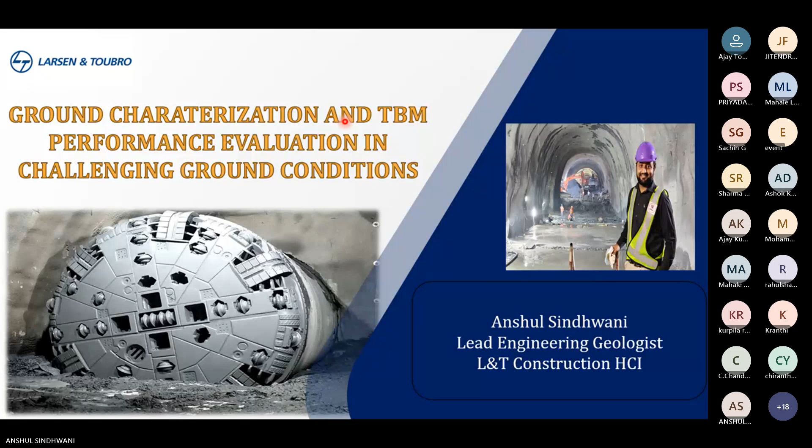So I'll just start now. Some of the summary which I'll be covering today: introduction of the particular case I am speaking about, geology of that area, geophysical investigations, ground improvement. We had made some key observations before TBM excavation and during TBM excavation. Since the topic is focused on challenging ground conditions, what exactly is the effect of these difficult ground conditions on the TBM advance rates? Then I'll conclude.

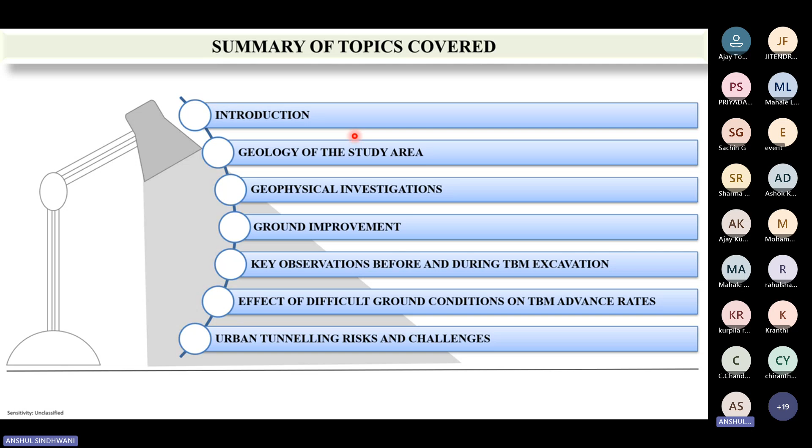Use of TBMs in urban and hydro projects have gained increased popularity in recent years. As we all know, it offers comparatively fast, safe, and high-speed tunneling. However, the lack of extensive investigation often leads to cost and time overruns of these projects. So the presented study will be an ideal example of how the integration of different sorts of investigations helps in reducing the ground uncertainties.

This is one of the projects in Mumbai where I've been involved as the engineering geologist. The study location, if you can see, is next to the Arabian Sea. This is in South Mumbai, and this particular location is sitting next to the sea. We call it the Machimar Nagar location. This is the particular location I'll be speaking on with regard to today's topic.

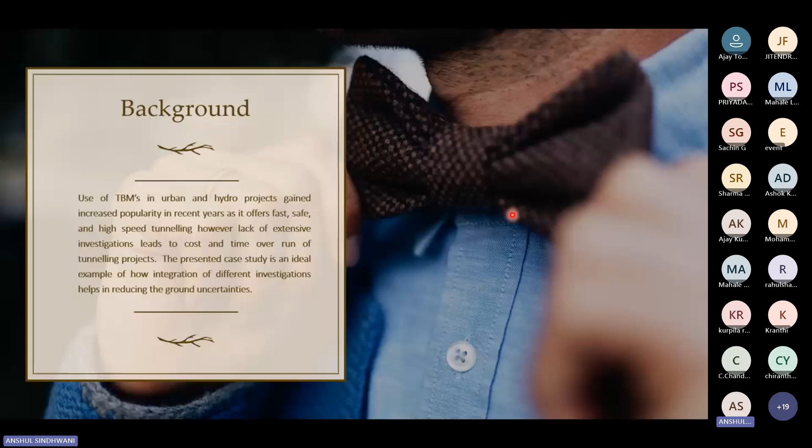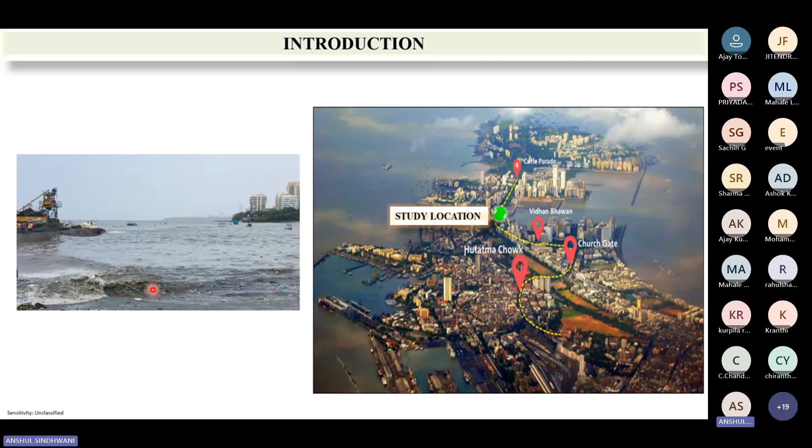If you can see a closer view of that particular location, you can clearly see the tunnel alignment was sitting next to the sea shore. So obviously, as a layman also, we'd anticipate some sort of difficult ground just by looking at this scenario. So understanding the ground in a detailed manner is very important in this particular case, which we got a feeling of as a geological engineer.

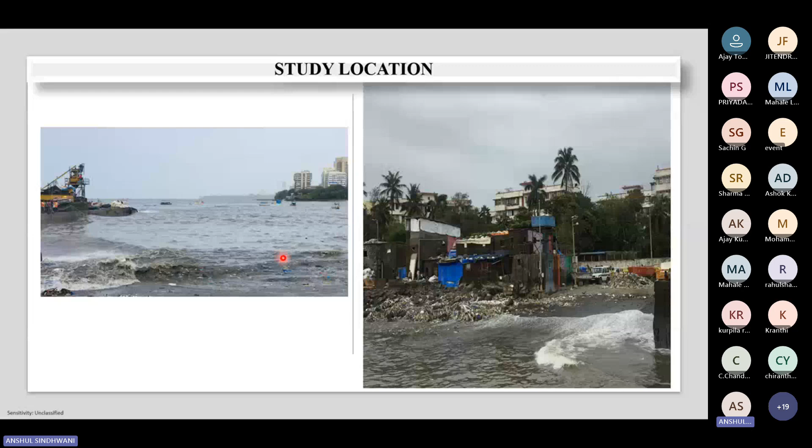This is just to have a more detailed view. This was the view standing on top of the tunnel alignment, and this is from the sea side. This is the location where our TBM tunnel was supposed to drive below this particular road. We can see there are high and low tide variations also happening along the seashore.

If I talk briefly about the regional geology, many of you might be aware that Mumbai actually consisted of seven different islands if we go back in the geological time scale. In fact, this Mumbai High Court, if any of you have seen it, was supposed to be the end of that specific Mumbai coast.

However, during the course of time, what we can clearly see is this is the present situation. If I backtrace this particular location along these three images, we can clearly see this was part of the sea earlier, and it is like a reclaimed land, where this tunneling was proposed.

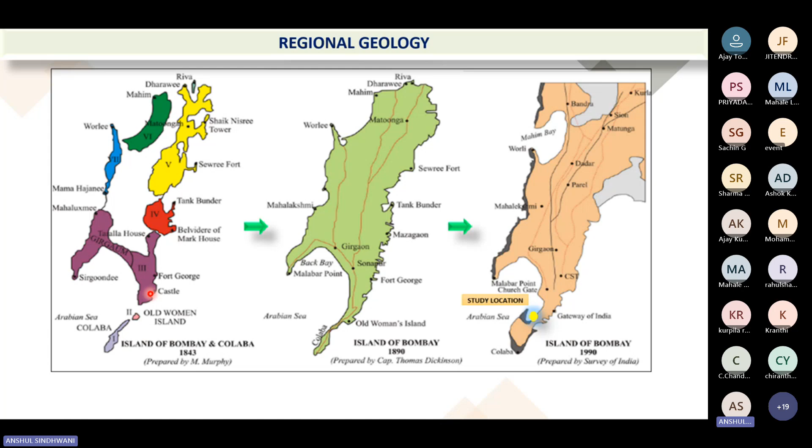So I'll brief again on these two boreholes' results. What we can see here, we had anticipated a filled up material and clayey sand, silty sand of 4 to 7 meter deep, and then a weathered basalt layer below. There is a bedrock basalt in one of the boreholes, whereas in the other borehole, you can clearly see there is a high degree of fracturation.

And in fact, when we did the packer permeability test in this particular zone, high water loss was also recorded, which indicates that the joints are open and fractured. Degree of fracturation was obviously visible in this particular case. So these two

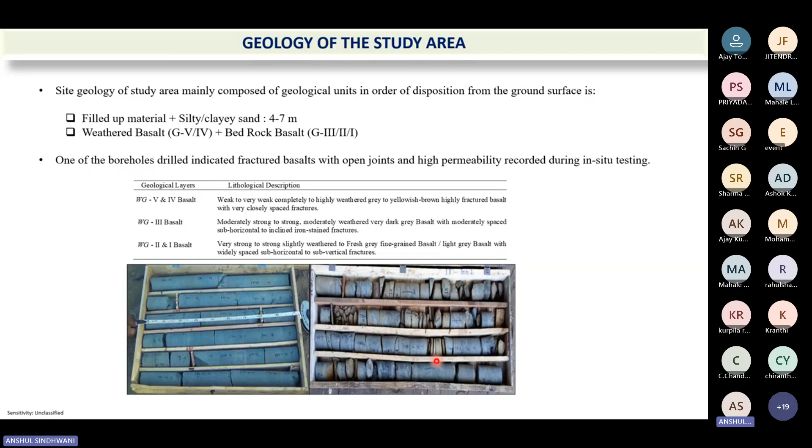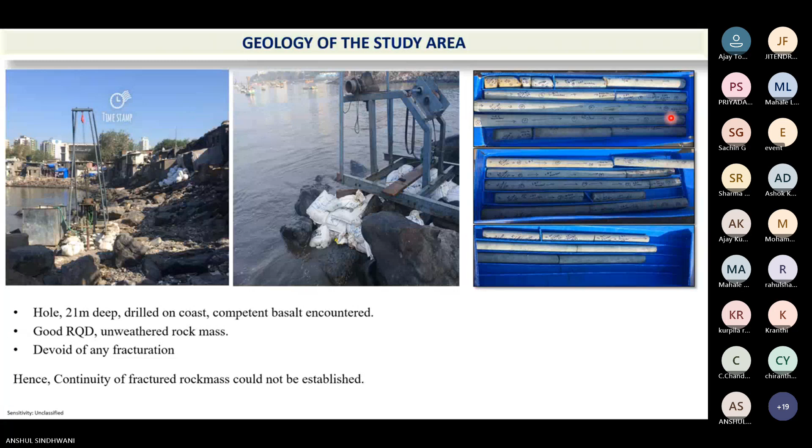But if we go back to the layout again, in one of the boreholes it is indicating there is a fractured zone. But when we are moving towards the sea, it is having good hard rock sitting below. So if we conclude these two particular things, you can clearly see the filled up material is rather going down. However, the degree of fracturation is only limited to this particular borehole. Other boreholes are indicating still a good rock.

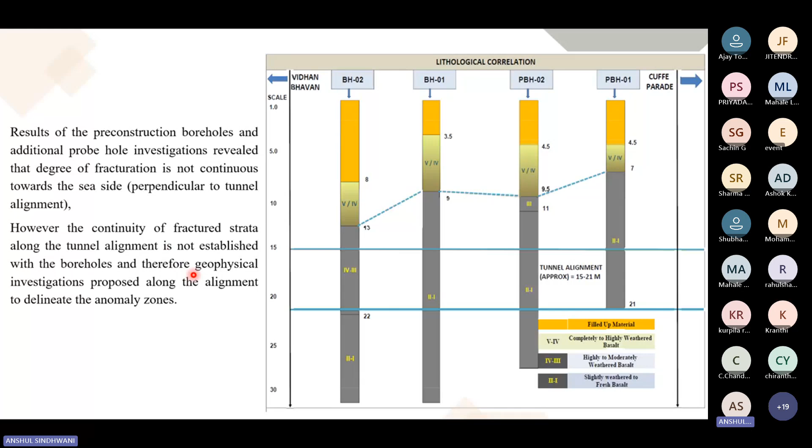So the result of these pre-construction boreholes and additional probe holes revealed that the degree of fracturation is not continuous towards the seaside, which is like a perpendicular direction to the tunnel alignment. However, this continuity of fractured strata along the tunnel alignment is not fully established with the boreholes. So then we decided to move on to the geophysical investigations along this alignment to delineate the anomaly zones.

So if I go back to the layout, these two lines we had proposed in the form of both electrical resistivity as well as seismic refraction, to have a detailed understanding and to integrate this data with the borehole investigation.

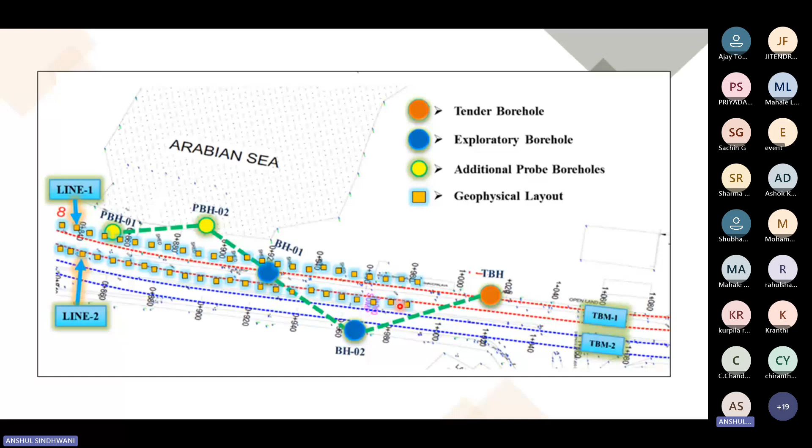So electrical resistivity did indicate a low resistive layer. If we see the 3D section on one side, which is toward the seaside, you can clearly see a domination of bedrock, having high resistivity, whereas on the other side, which is rather away from the seaside, there is a low resistive zone.

Even if we see in this cross section, it clearly depicts a low resistive zone on one side, whereas on the other side, it relates well with our investigation which we carried out on the seaside, and it revealed that the ground is definitely good when we are moving towards the seaside.

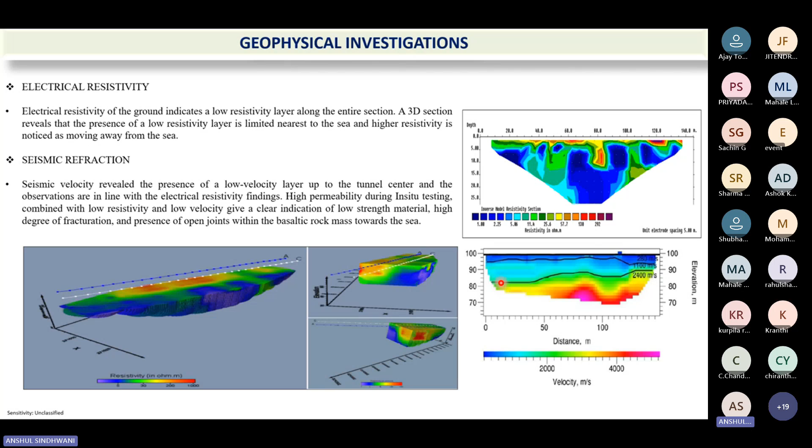Even when we go to the seismic refraction results, it clearly indicates there is a dipping of low velocity layer up to the tunnel depth in one of the lines which we executed. So then what we did is we plotted the exact tunnel zones in this geophysical investigation results so as to ascertain exactly at what particular point this is happening. So on the seaside, we can clearly see there are high resistive zones, there is no problem.

Whereas on the other side, there are low resistive zones sitting. Even in the seismic velocity, you can clearly see there is a low velocity zone encountered here. So with this data, we had confidence that the ground is not as bad as we were expecting, but at the same time, this fracturation or discontinuity will be there, localized, maybe 10, 20, or 30 meters, but not all along as we anticipated at first.

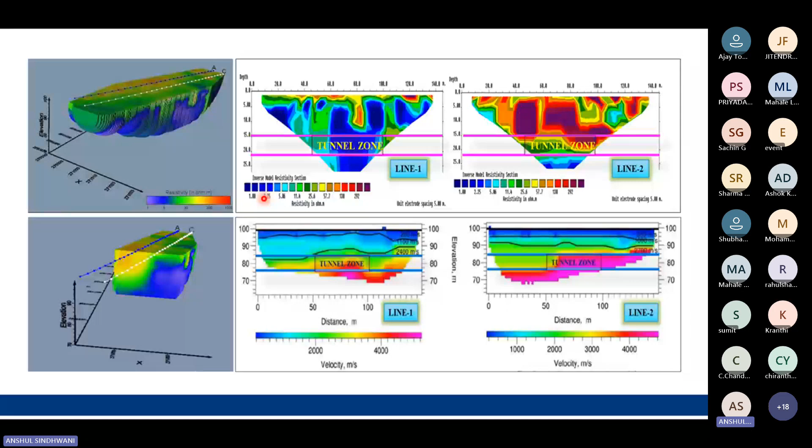This certainly helped us to understand what lies in the ground and what we could expect during the TBM drive. But after seeing this, we had to go for ground improvement as well.

But there was a limitation when doing the grouting, because if you can see the zone I'm indicating here, this was the zone where the slums were located, so in this particular area we could not do anything. Even on this side, it's a high traffic volume road running towards the Colaba side, so on the road too we could not do anything. This was a slum location where practically nothing could be done.

So we only did grouting at the zone where it was feasible, anticipating certain fracturation in three lines. Line one went up to 23 meter depth, almost 2 meters below the tunnel invert. Then there was a second line, which we call secondary, also going up to the tunnel invert. We created primary, secondary, and tertiary lines.

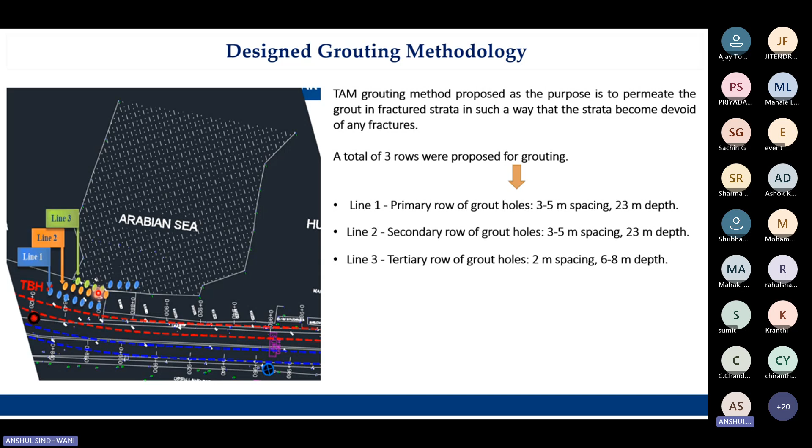The third line was specifically made only for the filled-up layer, because basaltic terrain has subvertical joints, so there was always a possibility of seawater seeping through this filled-up layer via the subvertical joints onto the tunnel alignment. So we did grouting as a tertiary row only for the filled-up layer, which is 6 to 8 meters deep, limited only to this particular zone.

With this experience, these are just some photographs depicting the work we carried out. You can clearly see this is on the seaside, where we did some improvement.

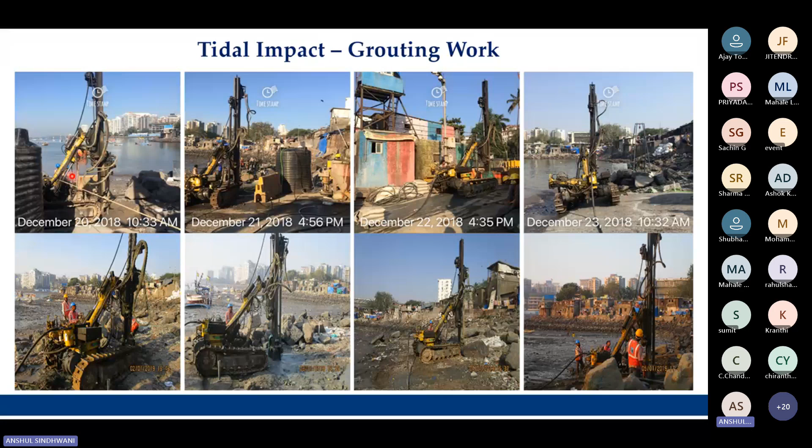This is just to give you a view of low tide and high tide. If you can clearly see on the bottom side, this is the low tide time where we could execute in a better manner, in comparison to the one on top which is during high tide, where it was not easily executable.

So moving forward, we had investigations in place to ascertain the challenging ground we were anticipating. Then we moved on to the ground improvement.

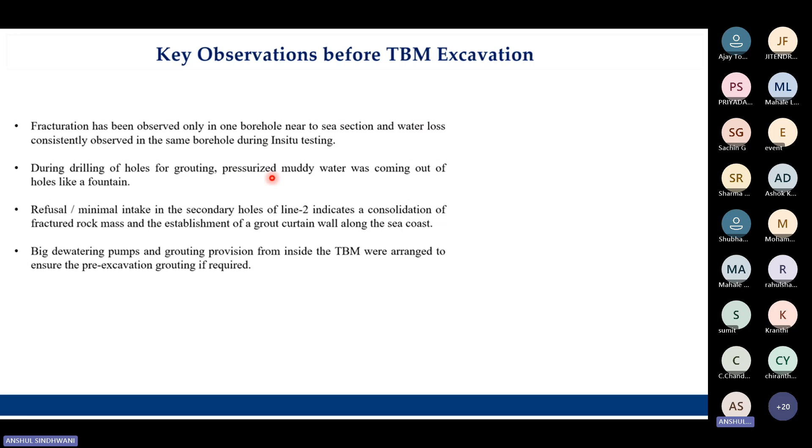Now, to sum up, there were some key observations made before TBM excavation: fracturation was observed only in the borehole, as discussed, and water loss was consistently observed in the same borehole during in-situ testing. During drilling of holes for grouting, pressurized muddy water was coming out of the holes like a fountain. I'll show a video to explain this further.

Just trying... hope it is visible now.

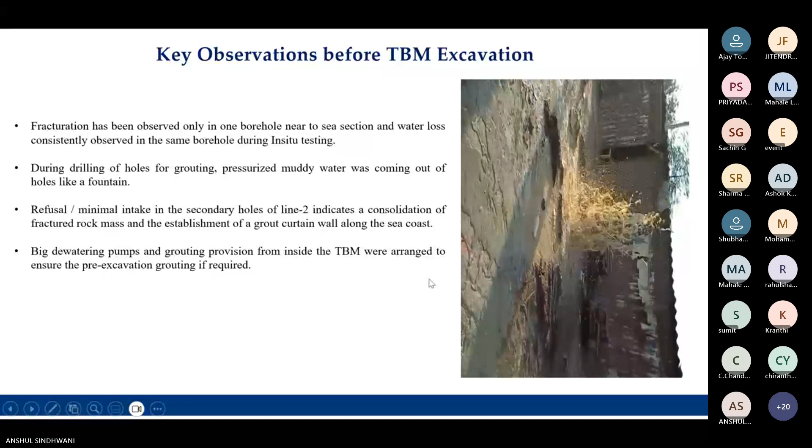So when we started executing the ground improvement, you can clearly see after the drilling is done, we were about to start grouting, and you can clearly see how the water is coming out. This really indicates the fact that this is a reclaimed zone, and since we punctured this reclaimed ground, the pressurized water present in the ground is coming out with certain pressure.

However, we moved ahead with the grouting, but this again gave an indication that the ground may have some challenges we are not fully able to delineate, where exactly it is, but it must be there in patches, which is our understanding.

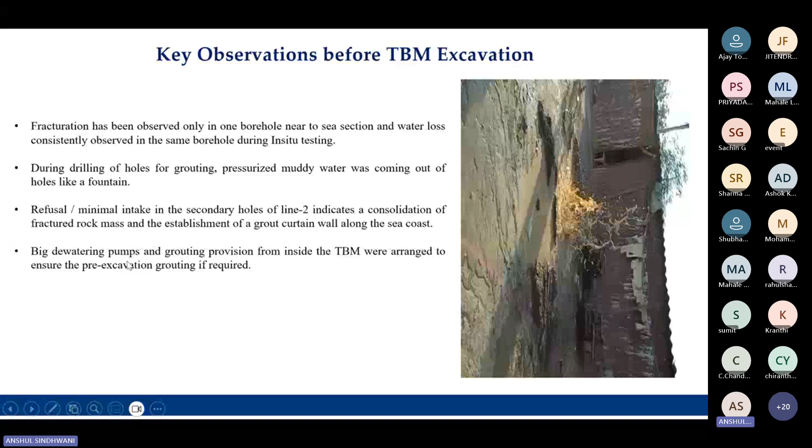So what we did is keep big dewatering pumps and grouting provisions ready from inside the TBM as well, to assure that if any situation arises during TBM excavation, we would be ready for high dewatering as well as pre-excavation grouting from the TBM.

Now, during the actual execution, since we are already aware that this is going to be running near the sea, we know exactly where the changes have to come. So there are three different zones. I'll just choose the pointer.

So zone one was grade 2 basalt, weathering grade 2 we call it. Then there is a moderately weathered zone, which is grade 3. And then there is a completely to highly weathered basalt, which is what we have been seeing in different pockets during our course of investigation.

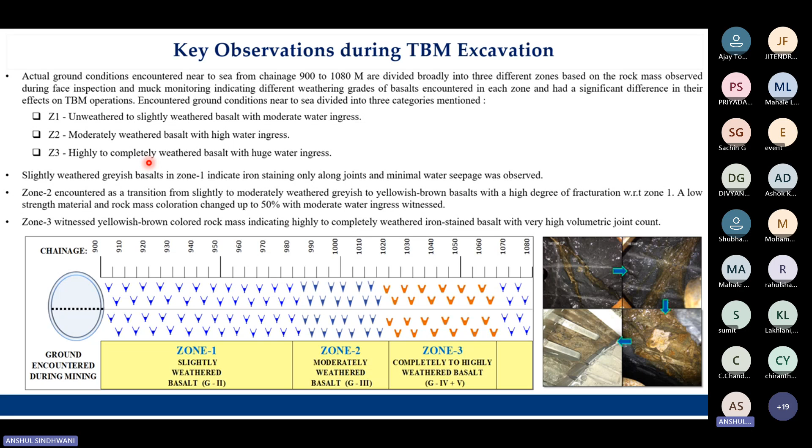So like I've said, zone 1 is unweathered to slightly weathered basalt with moderate water ingress. Zone 2, where we had anticipated high water ingress, and zone 3, where it has led to many challenges, which I'll be discussing subsequently.

So this is in terms of TBM advance rates, what we actually achieved during the course, exactly near the sea. This is again to depict we were doing two things at a time: one is the face inspection, where we physically see the ground, and another is rock chip evaluation. So you can clearly see how the degree of weathering is increasing as we move through different zones. Zone one, which is unweathered or slightly weathered basalt, achieved rates of 40 to 50 meters per week.

In zone two, it has even increased to 54 meters. This is because it is moderately weathered, so ideally the UCS becomes low in comparison to zone one. Even the RQD becomes low, so it is easier to achieve more progress.

However, when we move towards zone three, you can clearly see a 50% reduction in the advance rates, to 20 to 25 meters per week. And beyond zone three, again, slowly we have moved towards the same range as zone one. So this fourth zone indicates where again the unweathered basalt has been encountered.

If I talk about zone one, it was having compressive strength of more than 60 MPa. RQD was in the range of 70 to 100%, and we were classifying it as class 2 rock.

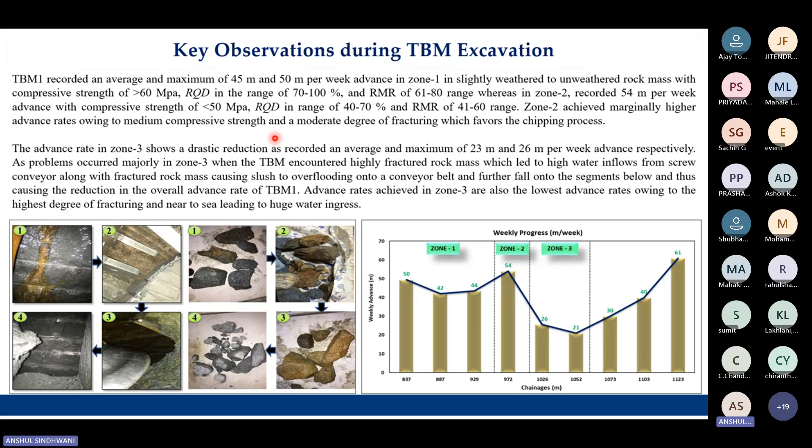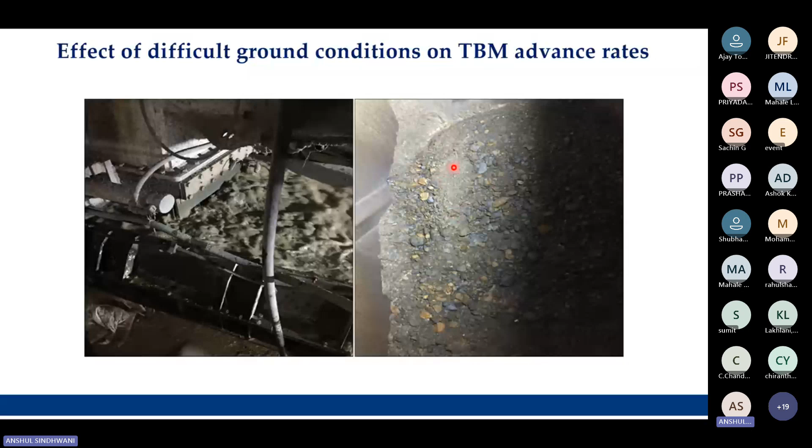Moving on to zone 3, you can clearly see muddy water coming out of the conveyor, and on the right hand side you can clearly see it is like a slush coming out. So 80 to 90% was mainly silt material, and the balance 10 to 20% was the weathered rock chips which we had encountered.

So this was more about what exactly we had encountered and what we anticipated before TBM excavation. Now I'll be talking about the evaluation part in terms of TBM performance, since the TBM performance is directly linked, and we know how to operate in these particular situations. If we are facing challenging ground conditions, that doesn't mean nothing can be done. Certain challenges can be reduced by optimizing the TBM operational parameters, which you will see here.

So I'll be speaking on 6 different parameters. The first 3 parameters are more related to the operations part, which is what is in our control, and then there are performance parameters, which are more related to the penetration rates. So if we can see in zone one, the thrust force was varied between 10,000 to 14,000.

Since it is an unweathered or slightly weathered rock mass, basically higher thrust forces are required. Whereas in zone 2, the thrust force has reduced below this green line, indicating a range of 8,000 to 10,000. This reduction is witnessed because of the moderate degree of fracturation and low compressive strength, which has basically eased the chipping process, so the thrust requirement has been reduced.

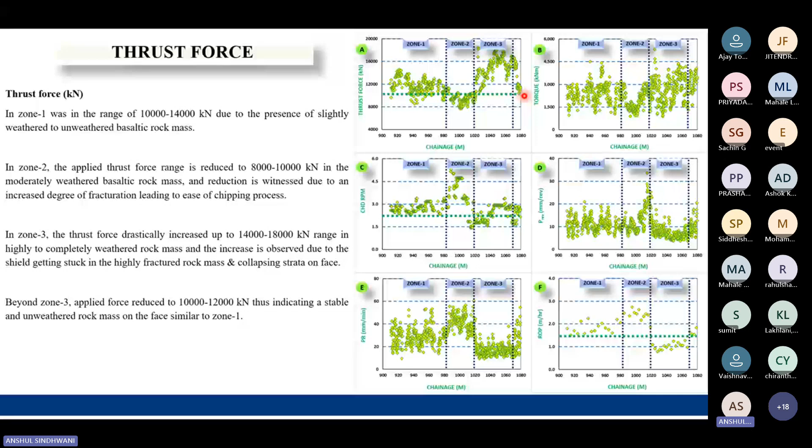If I move to the other parameter, torque, in zone 1 this is more of following a range of 1500 to 3000, indicating a smooth cutting of rock mass on the face. Whereas in zone 2, because of the moderate degree of fracturation and reduction of thrust forces, this torque has also reduced a bit.

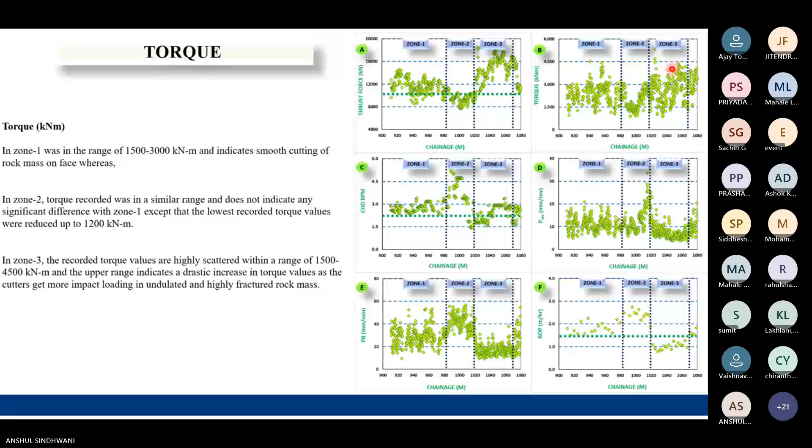Whereas in zone 3, there is high scattering. This scattering happens because when you have a fractured rock on the face of the TBM, there are always undulations. So the cutters get more impact loading when in touch with the rock mass, whereas on the other side there is no rock mass because of this degree of fracturation. So zone 3 indicates higher and lower values, creating a scattering pattern, which reveals the fact that the ground remains fractured in zone 3.

Now, if we go to the cutter head rotation speed, which is how many times the cutter head has revolved in a minute, for zone 1 we have followed a range of 2 to 3 revolutions per minute. This is bare minimum required because you have hard rock ahead of the TBM face, so you need the revolutions to be on a higher side to facilitate optimized penetration rate.

Whereas in zone 2, since we are getting low thrust force and the speeds are also increased, we can clearly see the increase in RPM, which has facilitated higher advance rates. In zone 3, there is a range bound we followed. On the first end it was from 1.5 to 2 only, and slowly it increased, following a pattern of 1.25 to 3.

If I sum up in this table, you can see all three parameters at once: thrust force, torque, and operational RPM, indicating the TBM operational parameters. Now, reduction in RPM is also to limit the disturbance to this highly fractured rock, because more RPM would lead to more degree of fracturation at the face, which will lead to more settlements and more shield confinement as well.

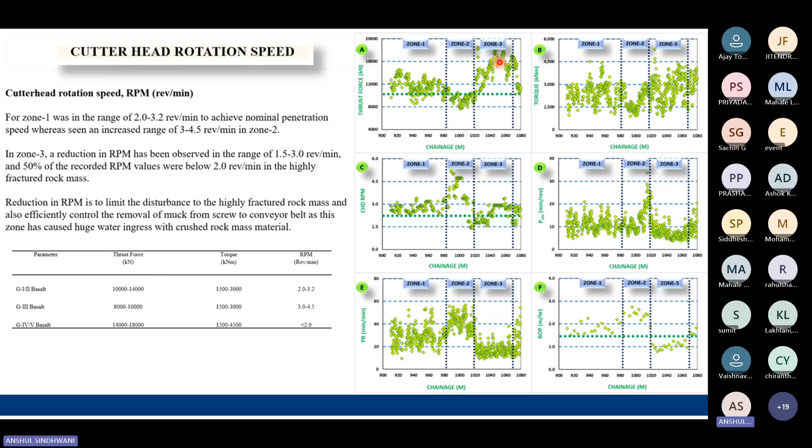So I forgot to tell you one thing. This thrust force has not only increased because of the extra muck we are keeping in the chamber, but also because of the shield confinement. When we have a fractured zone, our shield has passed through that fractured zone. Because of this high fracturation, the ground tends to settle in, so there is higher friction force in the shield, which is creating more thrust force.

Now moving on to the performance parameters. The first parameter is penetration per revolution. In zone 1, it has clearly followed a range of 8 to 16 to 20 mm per revolution.

Whereas in zone 2, it has again followed a similar range, but then it is shooting up a bit. If I conclude, it has mostly followed a range of 10 to 20 mm per revolution.

Whereas in zone 3, since we are going slow, we are cutting the rock slow. You can clearly see there is a dip below 10 mm. Average, if you see, it is coming out to be 6 to 8 mm only.

Now, this again indicates the fact that by our own will, we are going slow so as to assure we are limiting the surface settlements. At the same time, we are ensuring less water ingress is happening.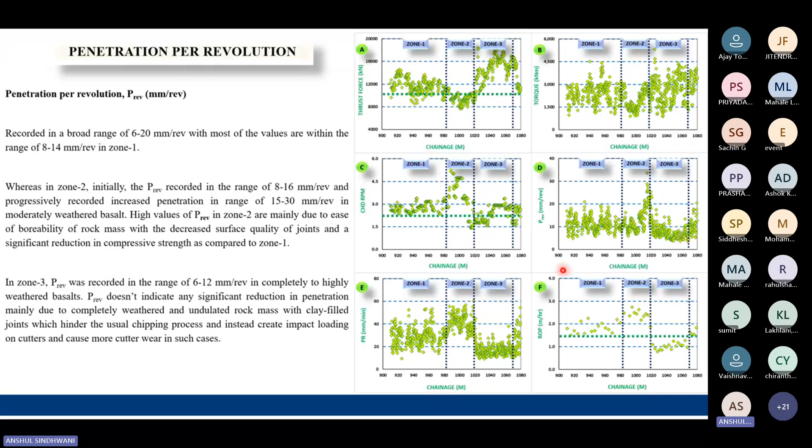Now, if we move on to the penetration rate, it is almost the same as what I talked about in the previous slide. The only difference is here we are talking about the penetration rate as mm per minute. So when you have penetration per revolution, you just multiply with the cutter head rotation RPM.

So let's say if you are getting a penetration per revolution as 10 mm, and your RPM is maintained as 2. So just a multiplication of 10 into 2, it becomes 20 mm per minute.

So if we see in zone 1, overall it has recorded a range of 20 to 40. In zone 2, it has shot up, which is resulting in higher progress as we have seen in the meter per week chart. And in zone 3, it has reduced below 20 mm per minute.

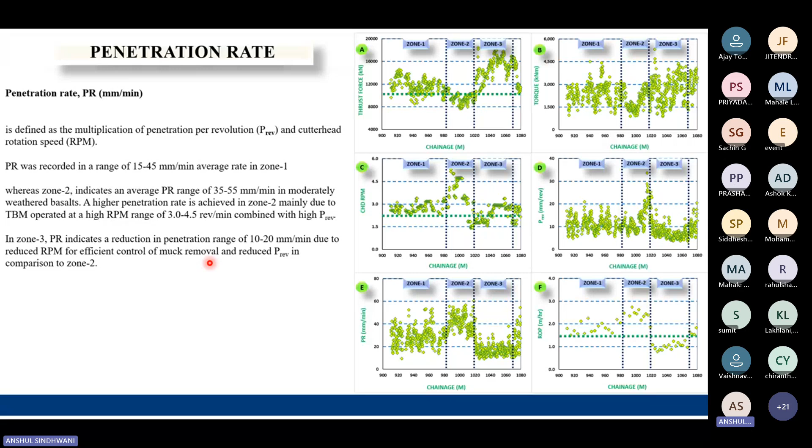Moving on to the next parameter. This is ROP, which again is the same as what I've talked about in the previous two slides, but it is in terms of meter per hour.

So let's say you have a mined length of each segment and you just divide it with the total time to get the meter per hour rate. Generally the segment length varies from 1.2 to 1.5. So let's say you have completed the mining of 1.5 meter in 80 minutes. You just convert into meter per hour.

So if we see in zone 1, we can clearly see it has followed a range of 1.5 to 2.2. Whereas in zone 2, it has increased from 2 to 2.8. In zone 3, it is up to 1 meter per hour.

So if I conclude and summarize all these three penetration parameters in different zones: in grade 1 and 2 basalt, the penetration per revolution was in a range of 8 to 14, penetration rate 15 to 45, and meter per hour 1.5 to 2.2.

Whereas in zone 2, which is grade 3 basalt, the penetration per revolution is 15 to 30 mm per revolution. Penetration rate is 35 to 55, whereas ROP is 2 to 2.8 meter per hour.

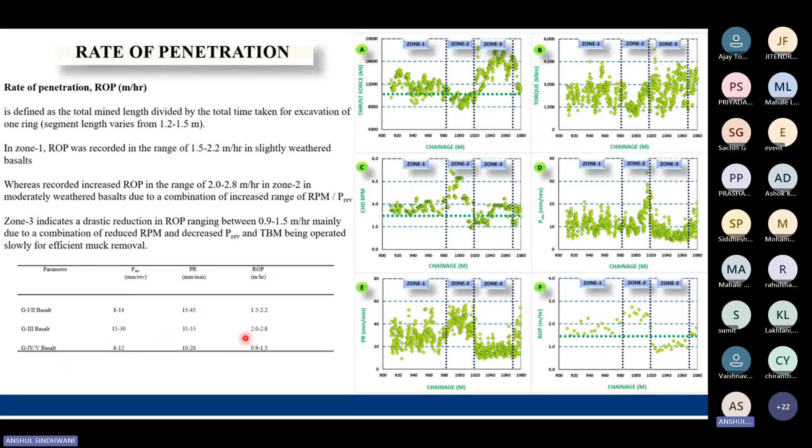So overall, if we see how exactly these different zones had affected our TBM performance: zone 1 has proved to be good for tunneling. We expect that in hard rock, and we achieved higher advance rates of up to 50 meter per week consistently.

Whereas in zone 2, it led to high water ingress. But then since the rock is hard, it doesn't give any sort of challenge, we managed well owing to high dewatering capacity, which we were prepared enough in advance. And then the advance rates are almost similar, maybe 5 to 10 meter, coming into the same range.

And zone 3 has led to huge water ingress with slush and crushed rock mass, which caused a drastic reduction in the advance rates of up to 25 meter per week. So this fractured zone has led to significant increase in applied thrust force, due to shield confinement and also caused by collapsing ground above.

For zone 2, a combination of high RPM and increased penetration resulted in ease of borability and a chipping process, whereas in zone 1, there was a reduction in penetration per revolution in comparison to zone 2 because of high UCS, unaltered joints, and low joint frequency.

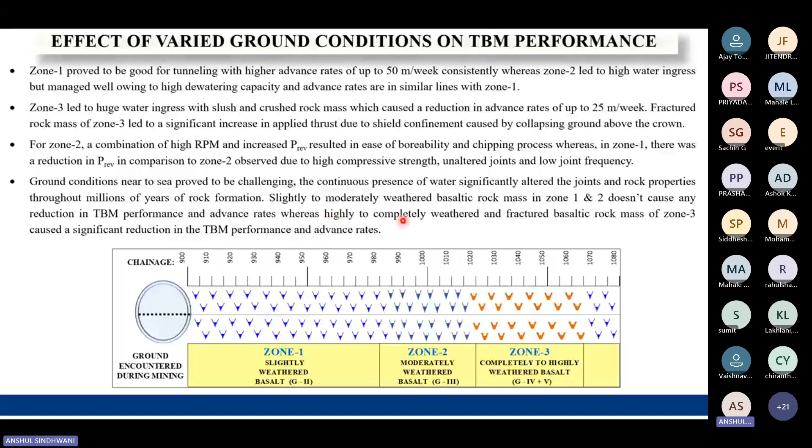So slightly to moderately weathered basalt in zone 1 and 2 doesn't cause any reduction in the TBM performance and advance rates, whereas highly to completely weathered basalt and fractured basaltic mass caused a significant reduction in the TBM performance and advance rates.

So with this, there are some key takeaways. First, like I have tried to explain in detail, how exactly the borehole investigations went through different stages - pre-tender, after award of tender, and even after the first round of investigation, how we led to the second round of investigation. Then we decided to go for geophysical investigation. Now, when we integrated all these investigations, we really got to know that challenges are there, but the level of challenges and the extent of it was not fully known. However, it had actually helped us to prepare ourselves to face those situations, and in fact given us a way to optimize the TBM parameters well in advance.

Now, the results definitely highlight the effect of highly fractured rock mass causing a significant reduction in the TBM performance.

So by this time we have realized the benefits of integrating the findings of different sorts of investigations. Even with geophysical investigation, we always try to recommend at least two different geophysical types, because it helps us to correlate between the two. If there's any sort of ambiguity, we can relate it with the borehole investigation. So even with geophysical, we always try to recommend two types of different geophysical investigation, and when related with the borehole investigation, it really gives a better understanding of the ground.

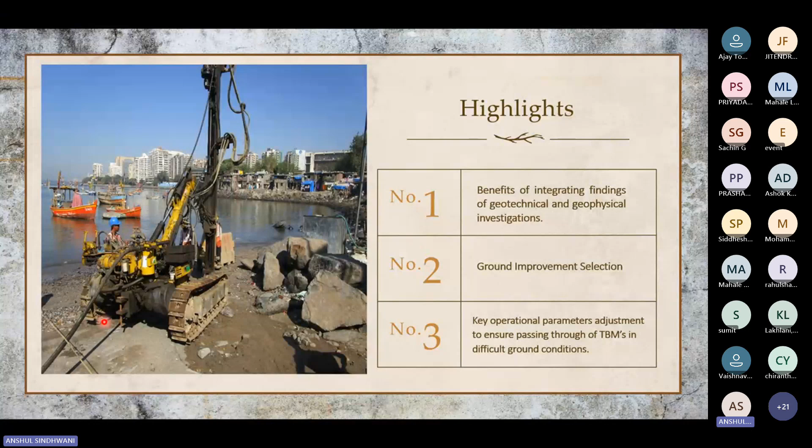And then the last thing is, key operational parameters need to be adjusted to ensure the passing through of TBMs. Like I said, these challenges are there when you are facing them on the TBM - it is not that they come on their own and you just have to face them. There are ways to optimize these parameters to ensure the TBMs can pass through in these difficult ground conditions.

So to conclude, one of the primary concerns in urban tunnels planned near the sea is high water inflows. We have faced a lot of challenges in Chennai Metro and Mumbai Metro because of the vicinity of the sea, and in fact it sometimes floods the tunnel during TBM excavation. Although since the ground is hard enough, it may not cause surface settlements all the time, but definitely it floods the tunnel if we are not prepared.

Now, risk mitigation is another very important aspect, which should be done through extensive investigations, and if required, some designed ground improvements must be done. However, the selection of a TBM is also a critical part - if the TBM's ability to handle such high water ingress is not there, then you are unable to do anything. Like I said, there are ways to optimize the operational parameters, but until and unless the TBM has that capacity to maneuver in these sorts of ground conditions, you'll not be able to do anything. So it is important to be considered.

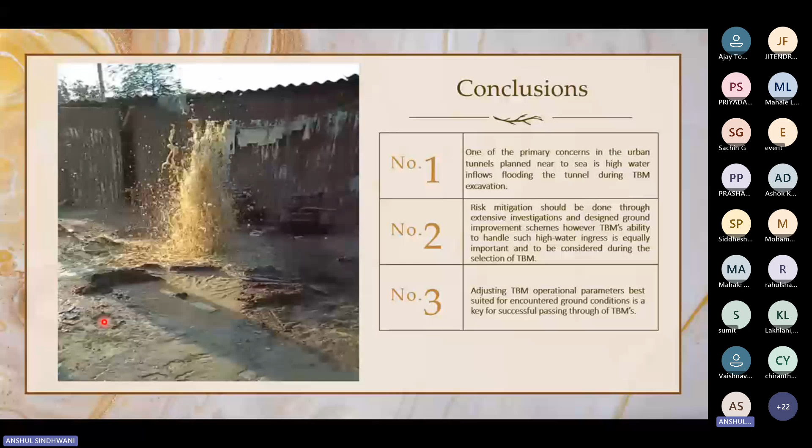All these parameters should be considered when we are selecting the TBM, and adjusting these operational parameters is best suited for encountering such difficult ground conditions. It is key for the successful passing through of these TBMs.

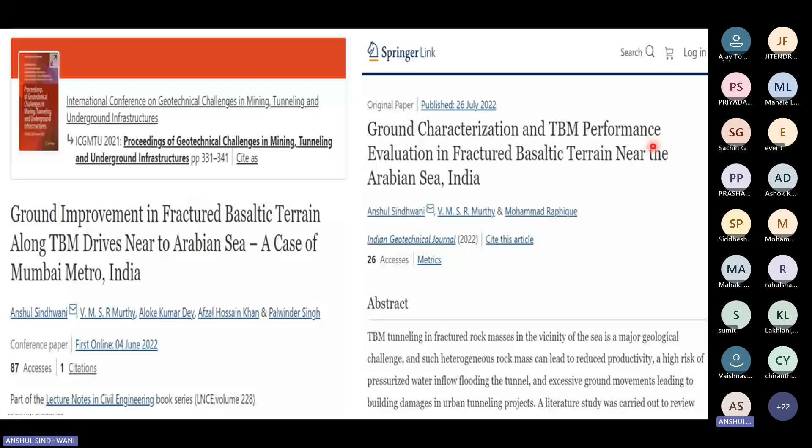So, in fact, I have published some papers related to this particular topic. You can see in this Indian Geotechnical Journal, I have published the same topic. And fortunately, I have also been awarded for the same paper at one of the IGS conferences - ground characterization and TBM performance evaluation in fractured basaltic terrain.

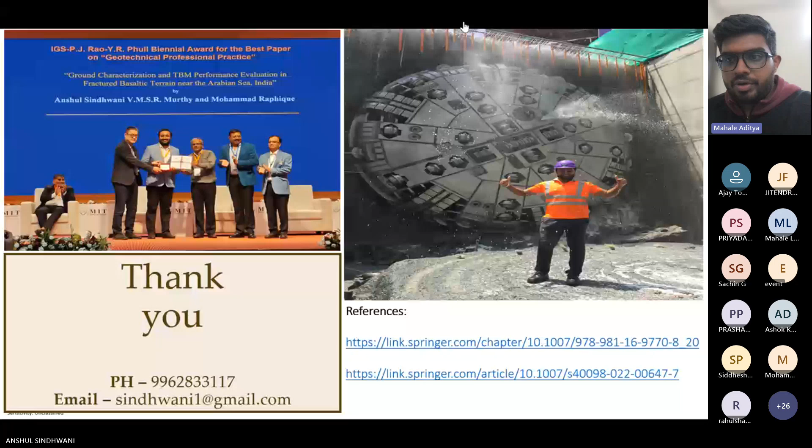Anshul, thank you for this great presentation. I would like to ask something: how much water did you observe during this mining, and what was the difference as expected during GIR? What precaution measures were taken to successfully pass this zone? Consolidation grouting is different, but did you do any additional pre-grouting for this zone?

Sir, in one of the boreholes where we first recorded this indication, water loss was happening. If I remember correctly, it was 200 liters per minute in the borehole I'm referring to. Regarding mitigation, wherever feasibility was there on the surface, we planned consolidation grouting, and our TBM was capable enough to ensure grouting of the TBM if required. But fortunately, we did not get the chance to use it because we were able to manage the ground condition, since there were no high-rise buildings on the surface.